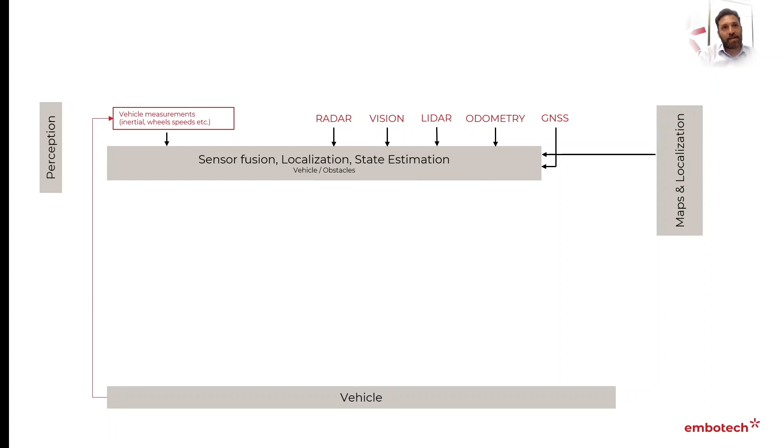This information might be augmented by other information like maps, whether HD maps or any sort of preloaded offline information, and all of this is what is normally called the perception layer of the autonomous vehicle software stack. So this is the perception. Now, once we have the perception information ready, we can then plan some navigation. So this could be a long-term route planning. Navigation together with sensor fusion, localization, and estimation will give rise to the behavioral planning of how the vehicle is going to make certain decisions.

From the sensor fusion, the perception layer, we can also do estimates on how other users are going to move in the environment. So how obstacles, whether other vehicles or pedestrians, are going to participate, and we're going to make predictions on how they're going to move in the future. And all this information together with the vehicle state estimation.

So state, remember that estimation is those things that we don't measure directly, but we estimate, we infer from other measurements, and also together with the drivable space and the high-level plan and the dynamical obstacle prediction, all fit together in what we call the motion planner. So the motion planner is the decision-making part that actually and eventually decides how the vehicle is going to move.

Again, I'm going to show a lot more details later on. And this is what we call the decision-making part. So decision-making is not just the motion planner, but it's also the prediction of the participants, the behavioral planning, and the navigation itself. The motion planning output is actually a detailed plan of how the vehicle will move. We will see later that there actually are two ways of doing the motion planner.

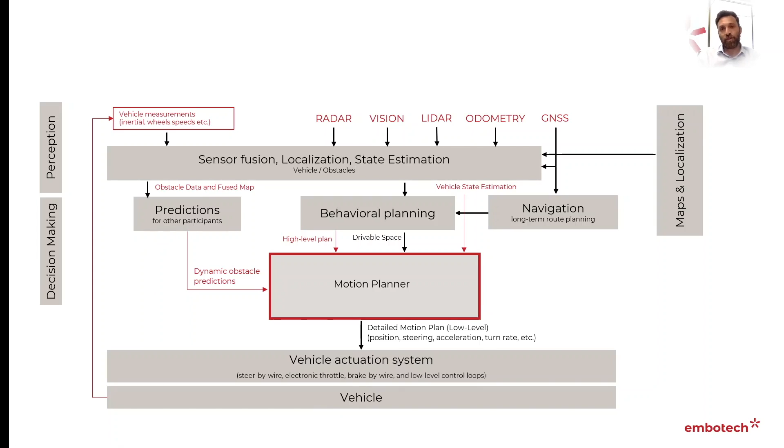Now, why is this not fed into the vehicle itself? Normally, a vehicle built by OEMs, original equipment manufacturers, already has its low-level controller. This is a very well-tuned controller that tracks certain commands. Here I give some examples, like the steer-by-wire, electronic throttle, and so on. So this information feeds the vehicle actuation system and eventually goes into the vehicle. And this is what we call the vehicle itself.

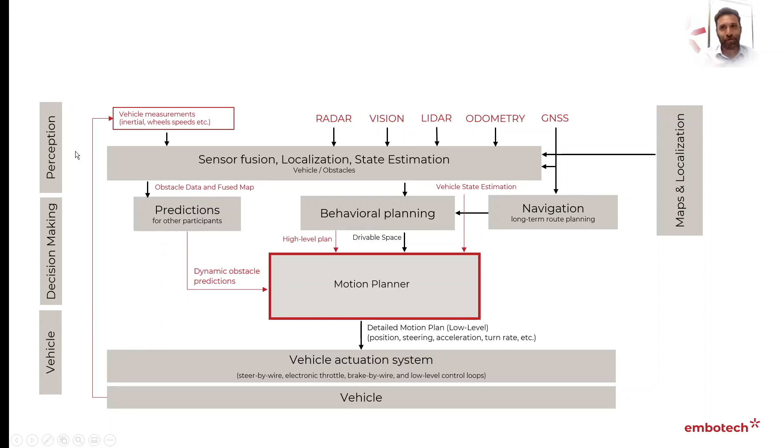So if you can see here, I've given a little bit of detail of the overall architecture of autonomous driving, but I split this architecture into three components: the vehicle, the decision making, and the perception. What's going to happen later on is I'm going to ignore the vehicle itself. This is pretty much the hardware with some low-level controllers, and I'm going to split the decision-making part and the perception into higher level blocks, and then I'm going to ignore the perception completely, not because it's not important, but because it's not the focus of this lecture, and focus on the decision-making part.

As I've already implied and actually mentioned a few times, this is not the only way of splitting the decision-making part, but it is kind of standard. I've seen it used often, and I think it's a good way of compartmentalizing the various components. Why do we tend to split the decision-making part into these 6 blocks? It is because there is a progression here on your slide from left to right on various parts.

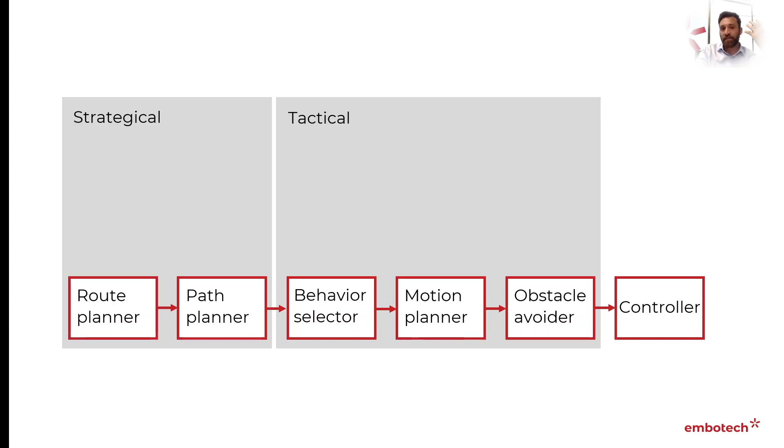And finally, there is the operational plan. Now we decided on the tactic. These are the commands that are going to be sent to the actuator to be able to follow the strategy. So this is yet another way of looking into things. I'm aware of companies that actually have internal departments split in this particular way.

Yet another way of looking at this is that what comes upstream is the motion strategy. So again, deciding how to move the vehicle. And within the motion strategy, we have what is called the scope for motion planning. So we leave the route planner outside. From the path planner to the obstacle avoider is what some people call the whole thing the motion planner. I give a slightly different definition. I call this the scope for motion planner, while the motion planner itself is one particular block within this area.

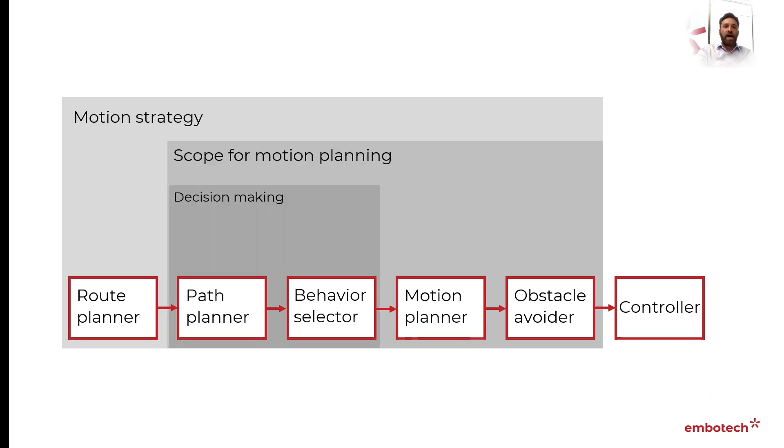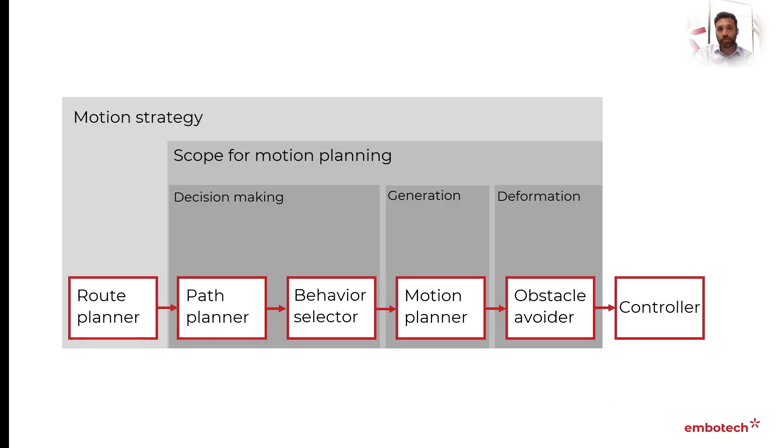And within the scope for motion planner, we have the decision-making part, which are the path planner and the behavior selector. What sometimes is called the generation, which is the motion planner. So generation in terms of generating a trajectory for the decision-making part. And then the deformation. This is called deformation because once we have a trajectory generated by the motion planner, we might want to deform or slightly modify this trajectory in order to avoid an obstacle.

Okay, so this is the end of this first lecture. What I want you to remember, if you have to forget about everything else, is that the decision-making part of motion planner is pretty much a cascaded approach. And there is a reason why it's cascaded, because upstream we have decisions that are slow to make and not very safety critical, and maybe with a very long horizon, while downstream we have very fast decisions to make with very short horizon, maybe no horizon at all, which are also very safety critical.

And also I want to make a point that it is still very unclear where some of these boundaries are. This is a good general framework, but there are no standards yet, and various companies or various research groups might split the decision-making part into different blocks.

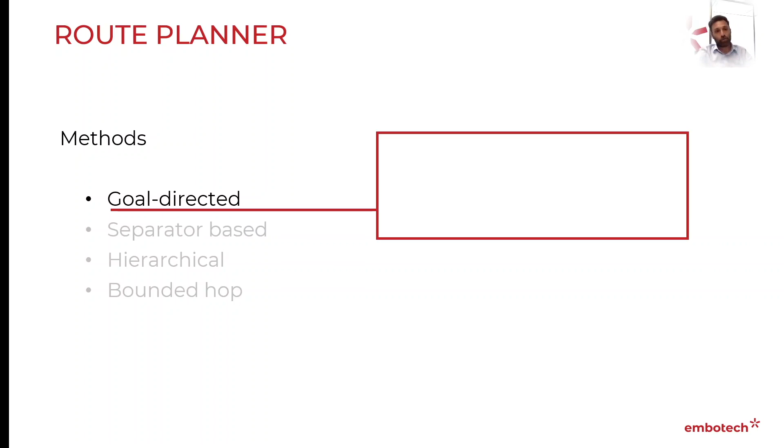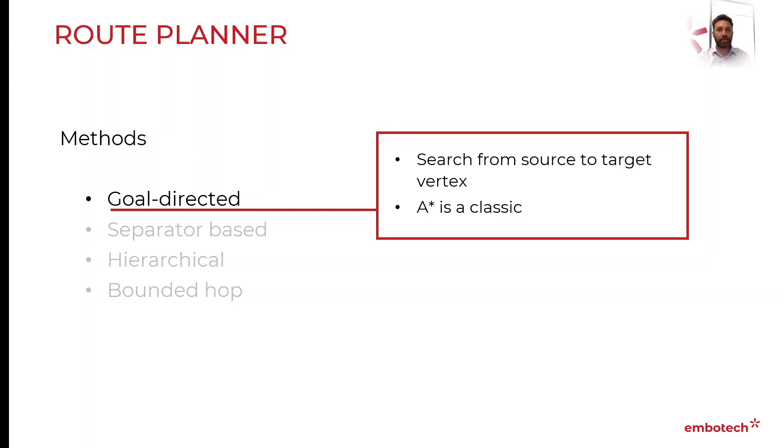Let's start from the goal-directed method. This is a search from the source to a target vertex. A-star is a classic algorithm for this. We will see the A-star algorithm appearing more than once throughout these classes.

The separator-based method is yet another way to perform route planning. In this method, we coarsify the graph by a vertex separator, superimposing another graph that is a simplified version of the underlying graph. The reason for that is to reduce computational complexity.

So a vertex separator is a small subset of vertices, a smaller graph. This creates an overlay graph which is much smaller, and therefore faster for a search algorithm to find a route from a beginning to an end.

Another method is the hierarchical method. This exploits the hierarchy of road networks. To give an example, to go from A to B there might be a lot of countryside lanes, but also a motorway. With this method, we will start from the motorway, if the motorway is an allowed path.

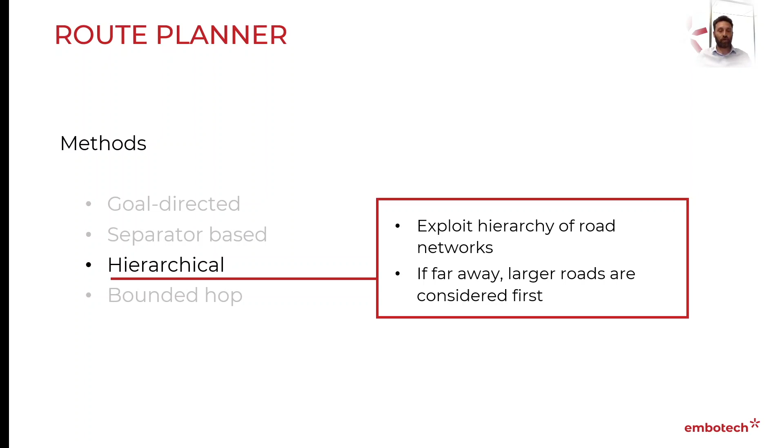That, of course, will simplify the graph, but we simplify it starting from some knowledge about the different vertices and edges that make up this graph, because we're talking about a roadway network. This method is particularly useful if you're trying to connect two very far away points - it makes sense to consider large roads first, and then go into smaller roads.

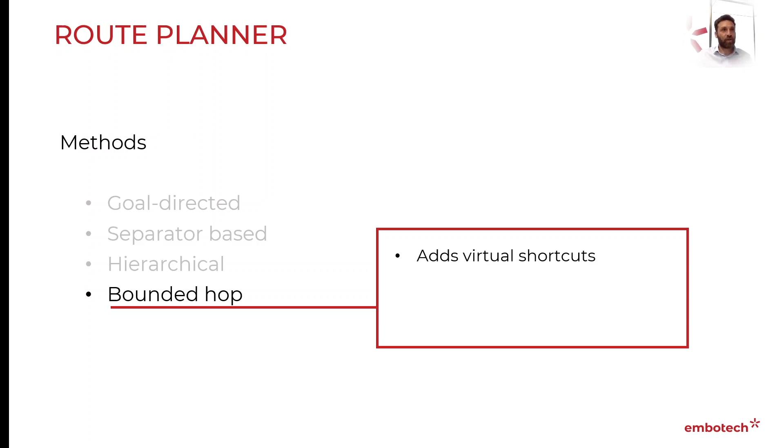Finally, there's this other method called the bounded hop method. Here we add virtual shortcuts - we make up a connection between two vertices that doesn't exist, but this connection possibly represents the shortest distance, and we pre-compute the distances between these vertices.

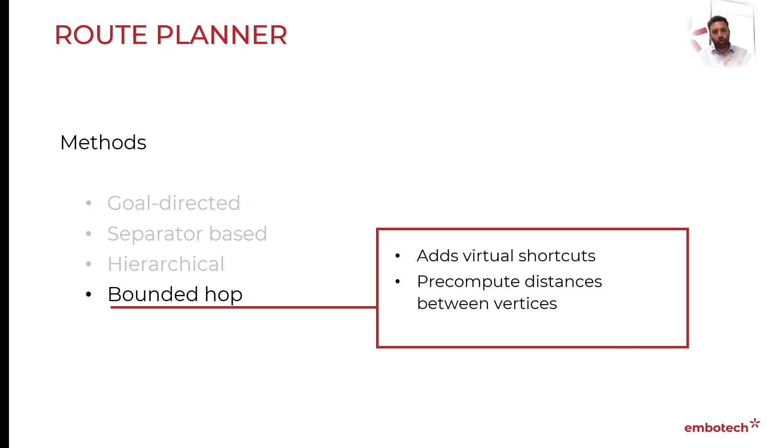Sorry for skipping to the next one. With this method, we make yet another approximation, based on the fact that we know pretty much what the shortest direction is, and then we try to fit a path to go there that is constrained by the actual route. So this is enough for the route planner.

The output of the route planner, which is a sequence of waypoints, will be fed into the path planner. The path planner computes a path for a given route. A path is a sequence of poses, and a pose is an x and y position plus an orientation.

This is an important point to make, that a pose is not just the x-y position of a vehicle, we're also interested in the orientation. This is possibly because vehicles are so-called non-holonomic systems. I'm not going to say much about non-holonomicity, but this is to do with the fact that there are non-integrable constraints.

But in any case, a path planner refines the path given by the route planner, trying to find a more realistic way of moving from point A to point B. These are the two most common methods used: the graph search method, trying to find the best path between current state and goal state.

It's also a search space discretized method, so the search space is discretized somehow, and then a graph is imposed on top of the search space on an occupancy grid map.

Dijkstra or D-star algorithm are also common methods for graph search. It's super important for path planning. A-star builds on top of Dijkstra. Dijkstra you can see as a search method which is like a wave, trying to figure out all the possible ways to get from A to B, and then calculate the shortest possible path. A-star uses some heuristics to find the shortest path, so it's quicker, it's more prone to mistake, but in practice it works much better. Curve interpolation is another widely used method for path planners.

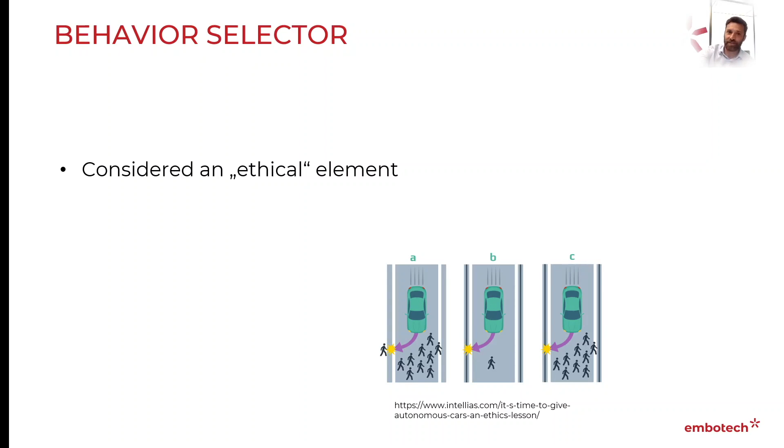But the behavior selector is indeed considered the ethical element in autonomous driving. This block usually uses a combination of heuristics and finite state machines to select the right behavior. Methods are indeed finite state machines, discrete rules based on traffic, and it's often difficult to model because of uncertainty in very complex scenarios. So finite states work very well in simple scenarios, imagine like motorway driving, where possibly the only choice you have is either keeping the lane or changing lane. But imagine a very complex urban intersection, and you can see how the finite state machine becomes very complex very quickly.

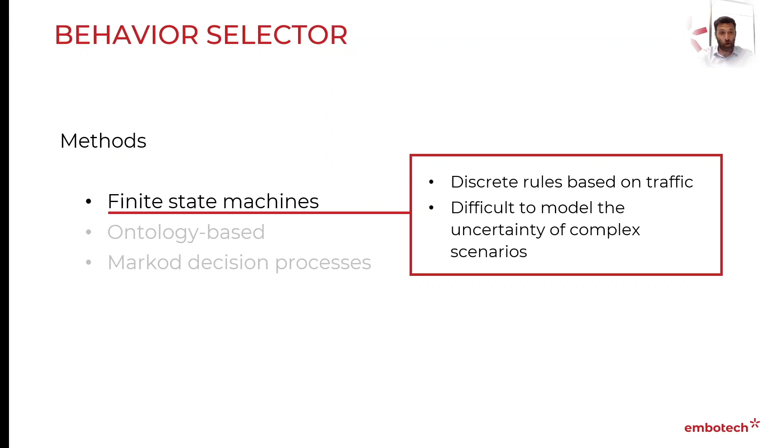Then there is this other set of methods called ontology-based. Ontology is sort of a knowledge-based method, a framework for knowledge representation. It considers rules of the road and makes decisions such as I'm going to stop, I'm going to go right, left, and so on. It builds a complex model at each location, and this complex model actually needs to be built manually. So this method also tends to become quite cumbersome in a complex scenario.

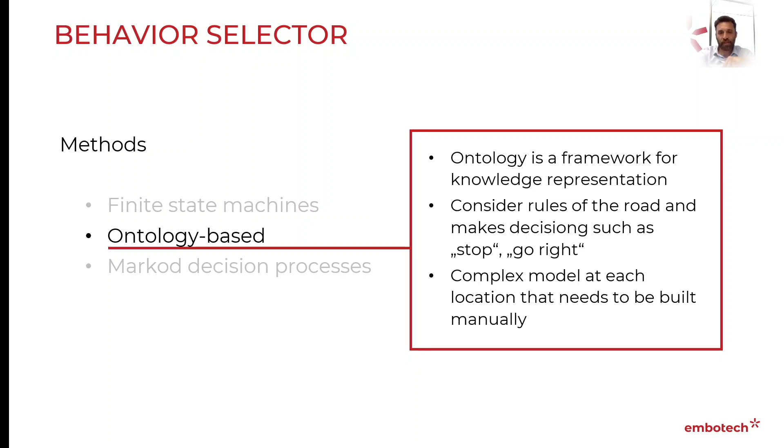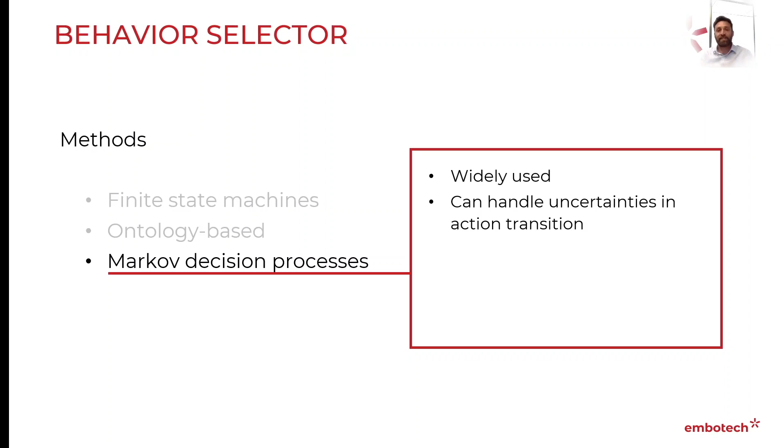And finally, there is a large class of methods broadly summarized as Markov decision processes. These are actually widely used. They can handle uncertainty in action transition. If you know what a Markov decision process is, you will see that's quite the case. So you define two particular scenarios, and in between is some sort of probabilistic distribution of cases.

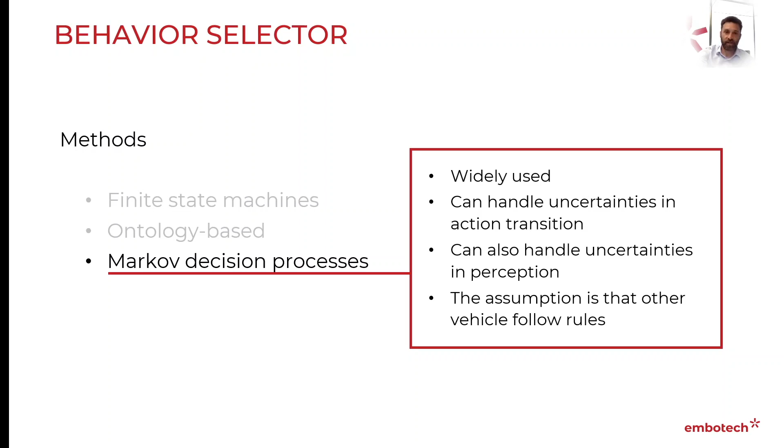Can also handle uncertainty in perception. That's an interesting thing, because although we're discussing decision making, you still have to deal with uncertainty in perception, and this method normally can be robust against error coming from the perception layer. The assumption is that other vehicles will also follow the rules, or follow this probabilistic transition in the Markovian decision matrix.

So the information from the behavior selector is finally fed to what people normally call the motion planner. The motion planner computes a trajectory from the current state to the current goal. And by the way, a goal is not necessarily an XY coordinate. A goal could be, for example, making progress along a road.

The trajectory follows the path selected by the behavior selector. So in a way, you could see the motion planner as an algorithm that makes a smooth trajectory based on the trajectory output of the behavior selector, and hopefully this trajectory is a physical trajectory that takes into account the physical constraints of the vehicle. So the trajectory needs to satisfy kinematic and dynamics constraints, for example tire limits or acceleration constraints of a vehicle.

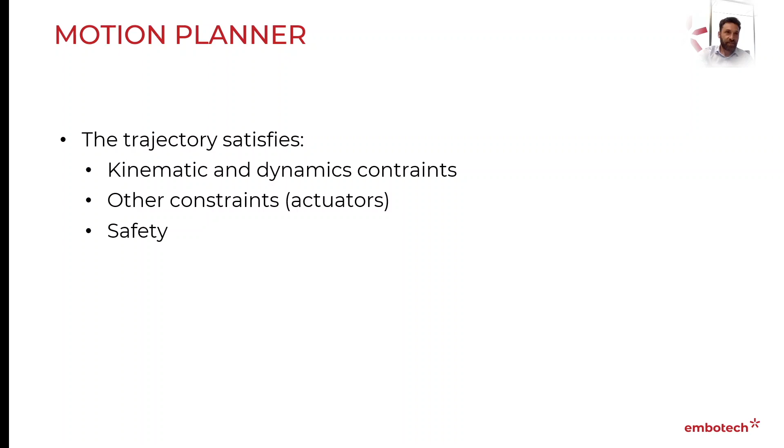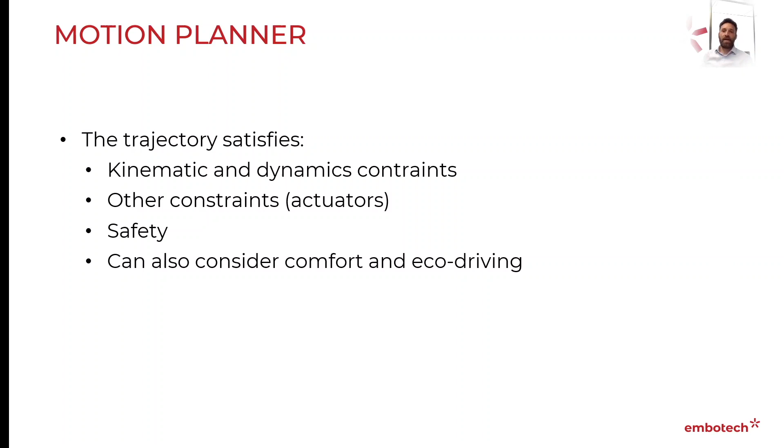It might satisfy other constraints, for example the maximum rate of turn - it's unrealistic to calculate a trajectory with a rate of turn that is beyond what the physical actuator can provide. The motion planner should take into account these physical constraints. It also takes into account safety, for example keeping stability of the vehicle. It can also consider higher level requirements, for example comfort, minimizing acceleration that can make passengers feel uncomfortable, or eco-driving, which means driving in a way that minimizes energy consumed.

So, by the way, a trajectory can be defined in two ways: as a sequence of actuator commands - literally turn the wheel by so many degrees, or accelerate by so much, or apply a braking force of so much. This command can be sent directly into your actuators if the update rate is high enough. Or the motion planner can simply output a sequence of states, in which case you will definitely need a low-level controller that maps these states into actuator commands.

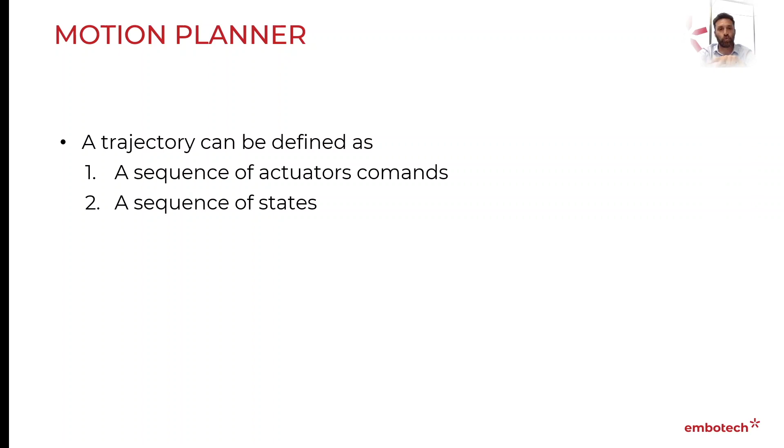It's important to distinguish between two types of driving here: structured space driving, for example road with lanes, versus unstructured space driving, for example driving in an open area like a car park. The distinction is important because in structured space you can make some assumptions, for example that you're driving along a lane and your objective is to make progress along the path. In unstructured space, the problem is slightly different - now you want to drive the vehicle from pose A to pose B, because the orientation of the vehicle also matters.

Here the type of algorithm we use is slightly different, and it's a slightly different problem to solve anyway. So the methods used for motion planning are again graph search - this is an extension of techniques used for behavior planning. The same graph search methods described earlier can be used here, but more refined, including more states. Commonly used methods are the state lattice method, elastic band, and A-star again.

I will say more on the next lecture regarding these methods. The sampling-based method is another one - here we randomly sample the state space, and then try to look at trajectories along this random sample. The commonly used method is the so-called rapidly exploring random tree. It seems counterintuitive that using random points is a good idea, but in practice these random methods, for example the RRT method, provide very quick solutions that can then be verified later on to make sure the solution is feasible and applicable.

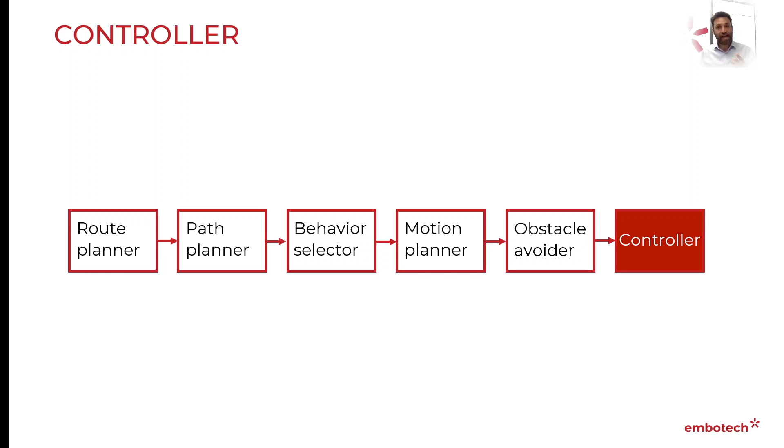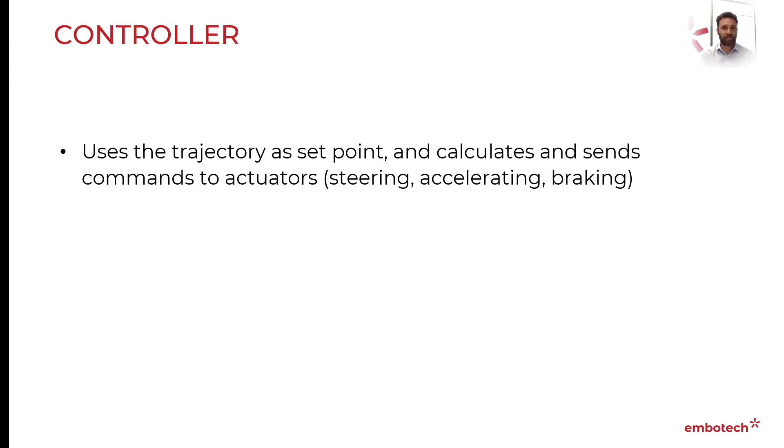This, of course, is a safety critical component, as you might have gathered. So normally the obstacle avoider is as simple as possible—the simpler the better. Finally, the trajectory, possibly tweaked by the obstacle avoider, is fed into a controller, sometimes called the low-level controller or the tracker. The controller uses the trajectory as a set point and calculates and sends commands to the actuator—steering, accelerating, and braking in a standard vehicle.

A controller can simply be a PID loop. You might remember from your control classes that PID stands for proportional integral derivative. This is a very simple reactive controller that tracks a particular set point, but nonlinear model predictive control could also be used.

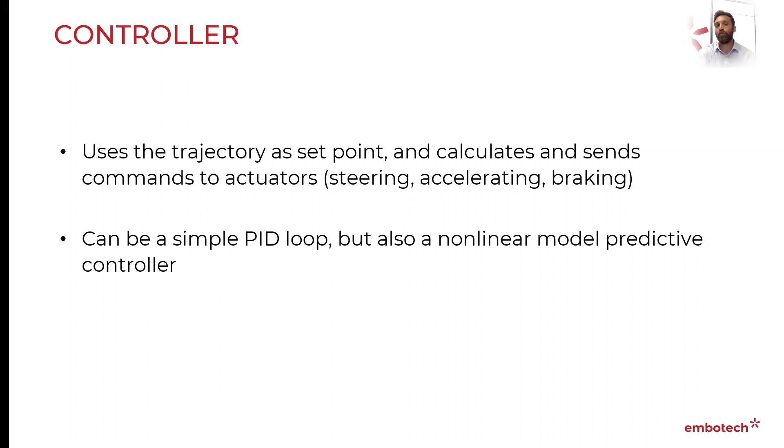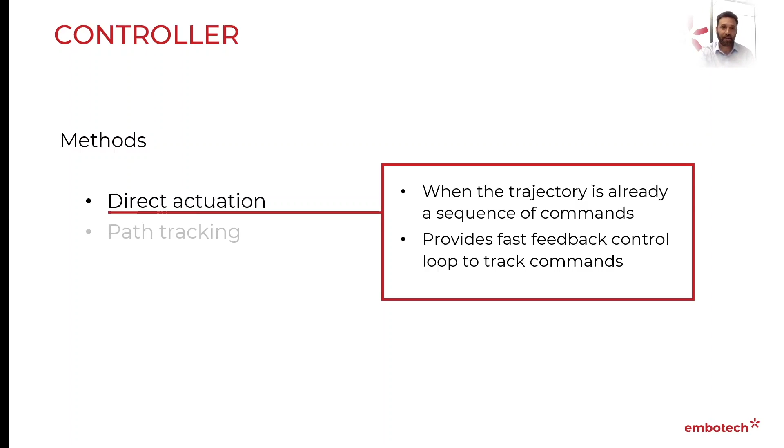We can distinguish the method into two types. One, direct actuation: if we assume the trajectory is already a sequence of commands, we can send it right down to the actuator, or provide another fast control loop to track the command. If the trajectory instead is a sequence of states, another set of methods called path tracking will transform the state into actuator commands, providing a fast feedback control loop to track states.

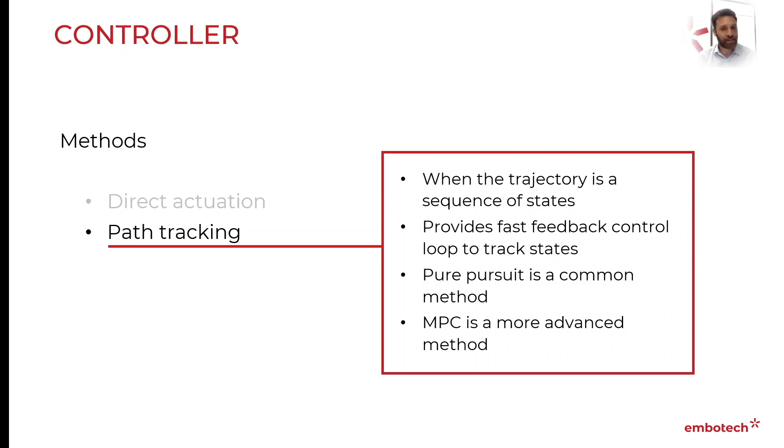The pure pursuit algorithm is a common and simple method. If you've never heard of pure pursuit, I recommend having a quick look, because it's such a classic that anyone taking a course in motion planning should know. But MPC is a much more performing method, and as I implied earlier, these days there are very fast solvers for this type of problem, so real-timeness is not so much of an issue.

Okay, so this is all I want to say about the second lecture. Takeaway points for this short video: decision making in autonomous driving is indeed a cascade of functions. I've described 6 functions here, but it could be less or more depending on how you architect your system. Boundaries between each function are quite arbitrary—later on you'll see another example where boundaries are defined differently. The algorithm choice is a compromise between computational speed, reacting to disturbances and new situations as quickly as possible, and generating an accurate plan for your vehicle.

And of course, the choice is highly dependent on the safety level required. You can have a very simple implementation that is not very safe. On the other hand, what we hope to achieve is a very safe implementation, which requires careful choice of algorithms to be safe, accurate, and computationally fast enough.

Okay, in the next lecture I'm going to leave out the route planner, not because it's not important, but because it's a big topic on its own. I'm also going to leave out the controller, again not because it's unimportant, but it's another big topic on its own, and I'm going to focus on those 4 blocks that define what people often call the scope for motion planning.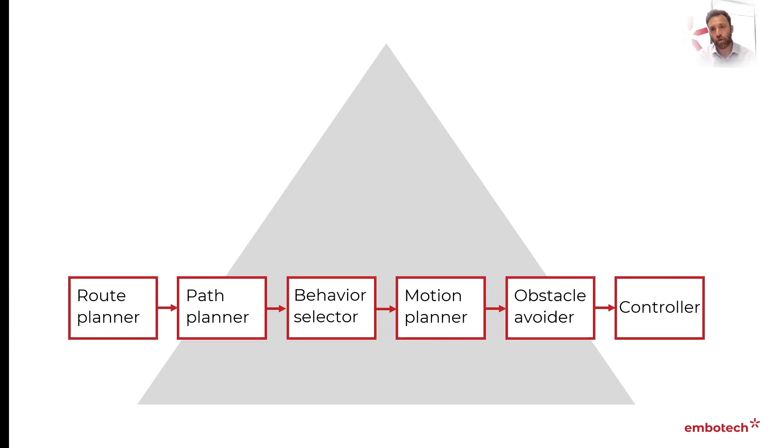And there are a lot of important points here to consider. First of all, what 'decides' means, what 'most convenient' means, and what the 'chosen criteria' are. These are actually very fundamental problems in motion planning. But let me tell you the way I see these, what these chosen criteria are and what 'most convenient' means. We can define some sort of a hierarchy of criteria. We need to drive a vehicle from A to B, or we need to have this vehicle follow a particular trajectory or make progress within a road. What are the things that we need to consider?

So first of all, I'm going to put point number 0 as the law of physics. And it sounds very obvious, but a lot of badly designed motion planners kind of ignore the law of physics, send a trajectory, a motion planning command to the actuators, and then they hope that the low-level controllers or whatever you have there can take into account the law of physics. So this is not something, the law of physics, you can escape—it's out there, but the more you take this into account at your planning stage, the less you leave it to chance in the real world. So that has to be put as number 0.

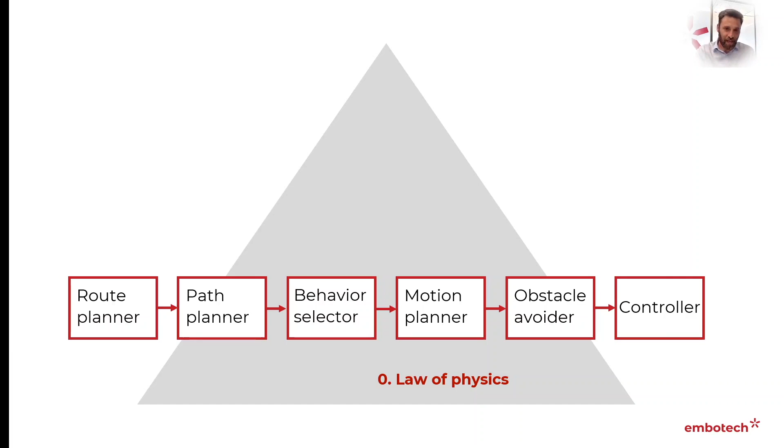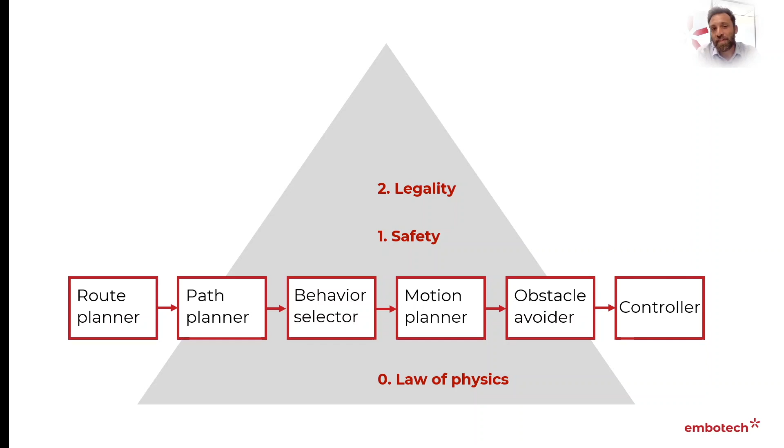Then number 1 in terms of consideration is, of course, safety. I don't think anyone has in mind to design a motion planner that doesn't consider safety at the very bottom level of decision making. And of course, by safety here, I'm thinking about not hitting any obstacles or not hurting anyone. Above safety, I would say there is legality. Once your motion planner can satisfy the safety requirement, the second thing you should care about is that you're respecting the rules of the road.

On top of legality, I like to think that the next constraint or requirement is physical and mental comfort. And what I mean by that is physical comfort in things like motion sickness, or actually feeling comfortable within a vehicle being driven by a robot. And what I mean by mental comfort is what some people also call perceived safety. And remember that an autonomously driven vehicle could be perfectly safe, but if it doesn't feel safe, that could give you some mental discomfort.

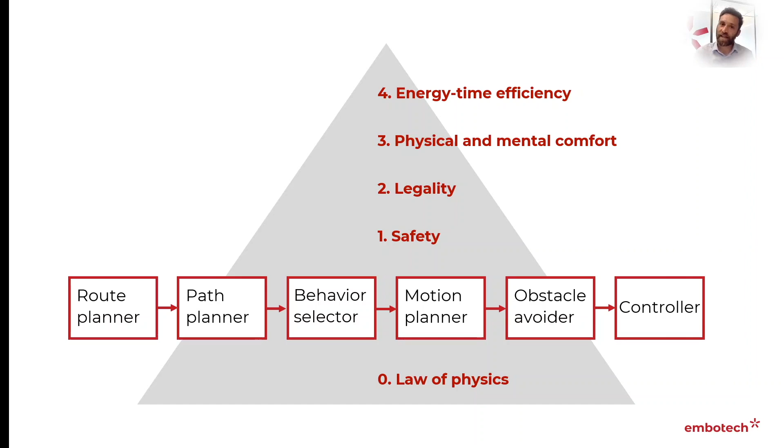And at the top of this pyramid, I will put other considerations such as energy and time efficiency. So once safety, legality, and comfort are accounted for, the motion planner could do things such as optimizing journey times or minimizing energy consumption.

For example, is the output a space? Is it a path? Is it a particular trajectory, a trajectory of waypoints or a trajectory of states? Is it a maneuver, so some sort of high-level information such as overtake or keep the lane, or is it even a symbolic representation? So this is one classification that can be made based on their type of output.

Another classification that can be made is based on the space-time property of the algorithms. This is basically to say, is the algorithm of some sort of predictive or reactive nature. So if you're familiar, for example, with dynamic programming or model predictive control, you already know that these are predictive types of algorithms, while reactive algorithms could be very simple control loops like a PID controller.

And finally, the third classification is to do with the mathematical domain the algorithms belong to. So this is the philosophy of the approach and the framework of the solver of what the algorithm is trying to figure out. So let's have a look now at a sub-classification of the algorithms.

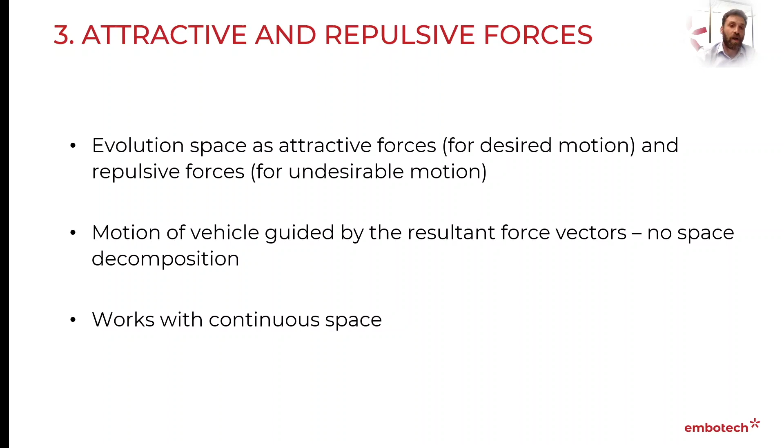So I'm going to show two of these algorithms. One is the so-called artificial potential field. Here in this method, we assume that the vehicle moves in an abstract artificial force field. As you can see here, there is an attraction force and repulsive forces given by obstacles.

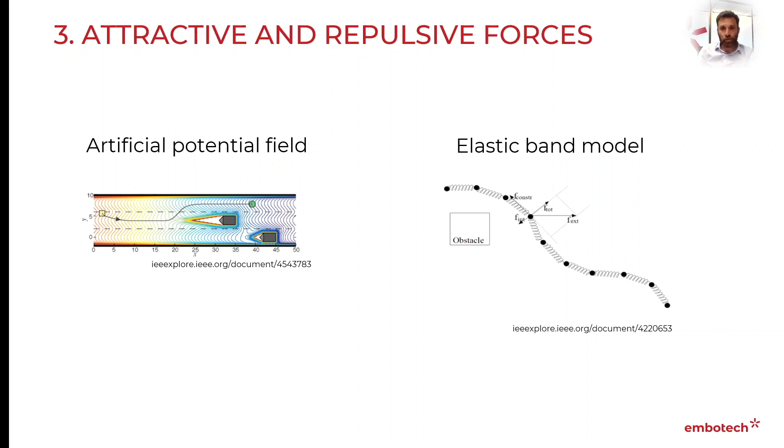Another type of algorithm is the so-called elastic band models. These are mainly used for lateral control and for obstacle avoidance. So the environment is modeled as a spring mass system. So if you think of a car moving through a field with obstacles and trying to maximize the distance between these obstacles, maybe a distance also proportional to the relative speed between obstacles, then having stiffness in springs that somehow reflects how far you want to be from these obstacles will give you a solution that goes through the obstacles.

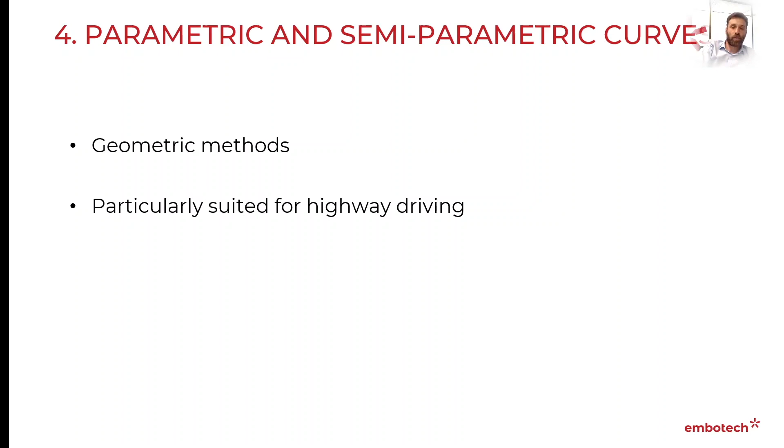The fourth class of algorithm is the parametric and semi-parametric curves. These are geometric methods. They are particularly suitable for highway driving, so for a structured space where we have lanes. These are curve-based algorithms that can implicitly take into account the kinematic constraints of the vehicle. I'm going to describe two here.

One is the point-free algorithm, for example, tentacle schemes. The point-free method builds kinematically feasible trajectories as a set of candidate solutions, which are basically maneuvers. As you build up these maneuvers, you need another algorithm, another decision maker, to choose the most convenient among these maneuvers.

The other set of methods are called point-based methods, and these are methods that use curves to fit waypoints, which could be sampling points or cells. So the output is a path or a trajectory. The curves can be used to have properties such as minimum length or minimum curvature, so they can include curvature constraints.

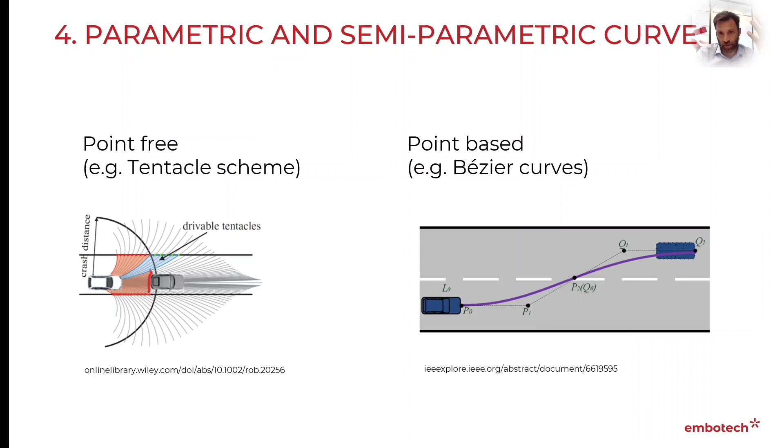Spline curves have good properties, and Bezier curves, like the curve shown here, are effectively an important class of spline. The important thing to remember with Bezier curves is that you don't necessarily go through waypoints, so you can cut through some corners. So these algorithms have to be used with care.

Now, the fifth class of motion planning algorithm can be grouped under the umbrella of artificial intelligence. There is so much there that I'm not going to even try to explain and classify everything, but just give some general guidelines. What artificial intelligence algorithms effectively do is try to simulate human reasoning and learning.

They are generic and flexible, which is both an advantage and a disadvantage. An advantage because they can learn, so automatically they can end up doing the right thing. The disadvantage is that you lose determinism. You don't know exactly what they learned and how they learned, which could be disastrous in motion planning. So they're mostly used for predictive planning, which is less safety critical; remember, predictive planning comes more upstream, more on the left of the sequence of block diagrams that we saw earlier.

We can classify artificial intelligence algorithms as human-like algorithms: risk estimators, taxonomy models, or game theoretical models. Then we have heuristic algorithms: support vector machines and evolutionary methods. Then the so-called approximate reasoning algorithms like fuzzy logic, artificial neural networks, and reinforcement learning. And finally, logic-based algorithms, which are more rigid and difficult to implement when the logic becomes difficult. These are rule-based algorithms, decision trees, and finite state machines.

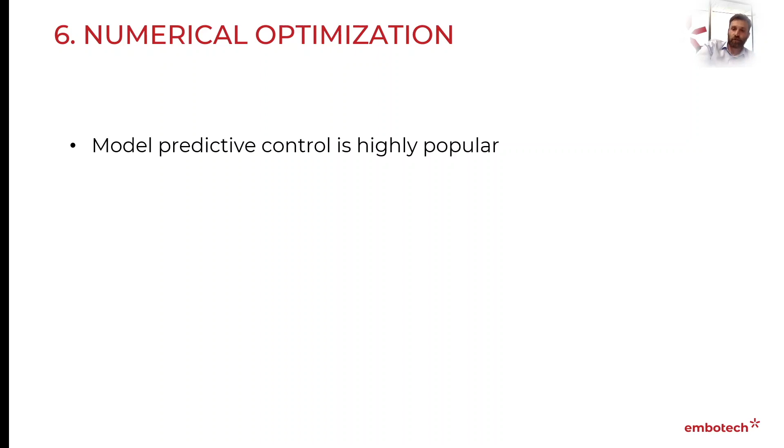Model predictive control is a highly popular method. Model predictive control uses numerical optimization to find a solution to the motion planning control problem. The solution often requires solving a nonlinear programming problem. Such problems, if not set up correctly, can be difficult to solve, but these days there are good solvers for finding effective solutions in real time. The problem is nonlinear because vehicle dynamics are inherently nonlinear.

Some approximations have been proposed where you first linearize the nonlinear model of the vehicle around some operating point, so you can solve a linear or quadratic problem effectively at each linearization point. But this is a trade-off to see whether the approximation is suitable. In general, if you're controlling a vehicle, the vehicle is a nonlinear system, and therefore a nonlinear programming problem will have to be solved.

Dynamic programming is another method widely used, especially for finding global solutions. There is the curse of dimensionality with dynamic programming, but on the other hand, you can easily deal with nonlinearities.

Let's have a look at what an optimization problem looks like. This is a generic form. If you've never seen things like this before, don't get scared by the notation. We'll try to explain what the things mean.

At the beginning, most of all, we need to have an objective function. The objective function is effectively a mathematical description of the goal you're trying to achieve. The goal could be hitting a goal state, or it could be, for example, making progress along a path.

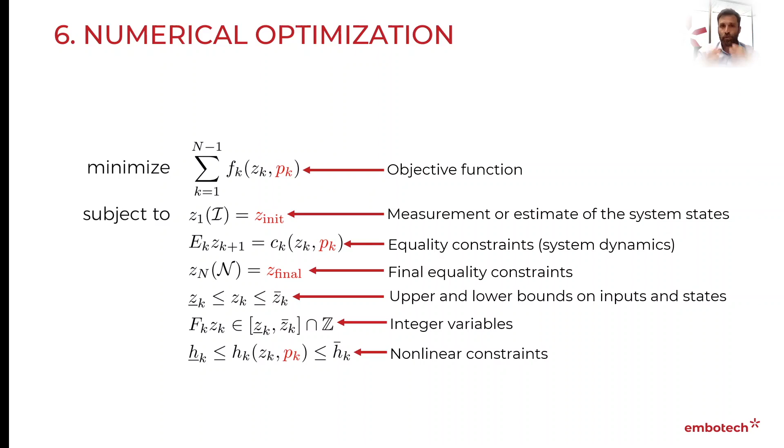There are upper and lower bounds. These are inequality constraints, for example, actuator limits or space limits. You can also include integer variables to make the problem more complex, and nonlinear constraints. This is pretty much the form of a numerical optimization problem. If you can describe your motion planning problem in this form, there are ready-made solvers for finding a solution.

The takeaway point of this lecture is that I presented a classification of algorithms for motion planning. The focus here was more on structured environments. These algorithms are particularly suitable for highway driving. In unstructured space, things can be a bit more complicated. I hope this lecture helped you make sense of the huge literature in this area.

In the paper I'm referring to, they have interesting spider maps where you can see how the algorithms map to the taxonomy we discussed in the previous lecture. For example, for space configuration algorithms, these are geometric methods and set algorithms in particular. For optimization algorithms, the last one I've described, these are solver algorithms and predictive horizon algorithms, but also make heavy use of logic and heuristics. Again, if you refer to the paper, you can see the mapping between algorithm type and taxonomy for all the other algorithms we discussed.

This concludes lecture 4, and it also concludes the architecture I presented. We started, if you remember, in lecture 1, looking at the full architecture of autonomous driving. Then we focused on the decision-making part, then went down to another layer of motion planning, and that's where we stopped. What's going to happen next? I'm going to deliver two more lectures: one on a particular control technique called model predictive control, and another on a more advanced method for motion planning.

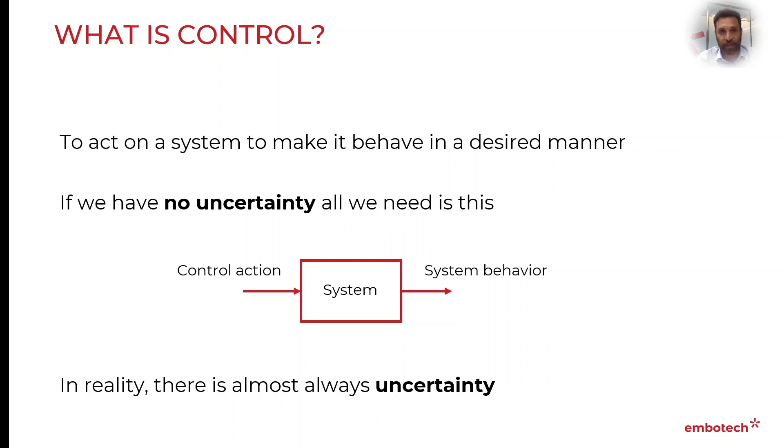So what is feedback control? It's the only way to deal with uncertainty. And this sounds obvious, but I think it's something people often miss. If there is no uncertainty, there is no need for feedback control. If there is uncertainty, the only way to deal with it is by feedback.

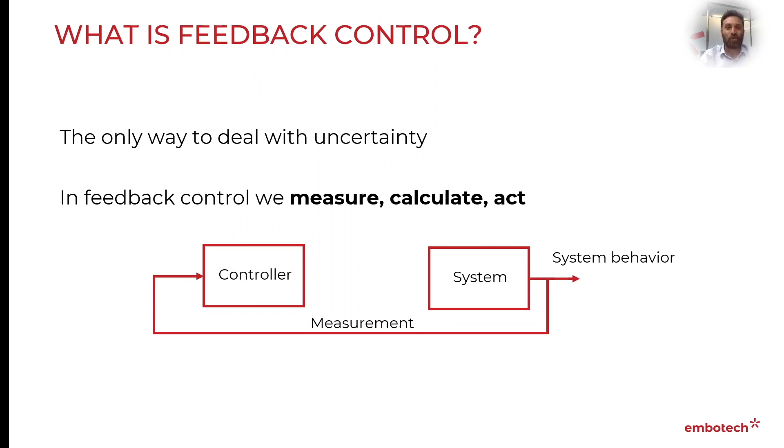So in feedback, what we do is measure, calculate, and act. So again, starting from our system, there is a system behavior we're trying to achieve. We take some measurement, put this measurement into a controller, the algorithm, and we calculate the control action. So the controller is actually where we execute our control algorithms.

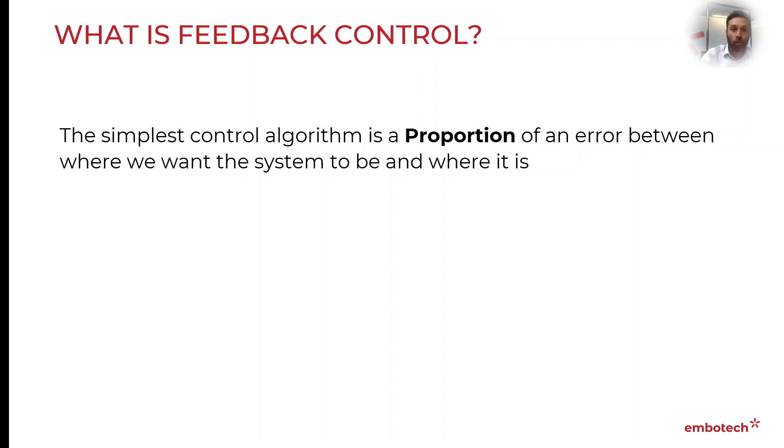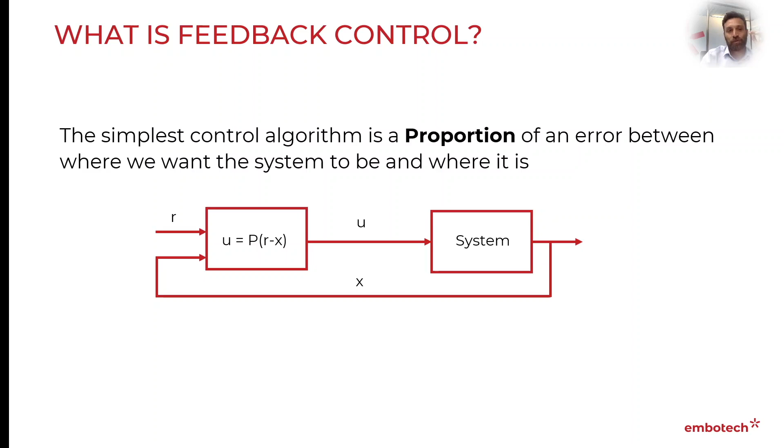So the simplest control algorithm is a proportion of an error between where we want the system to be and where it actually is. So for this very simple example, a simple control U is the proportion of a difference between the input R and our measurement X.

The control algorithm that computes the sum of the proportion, the integral, and the derivative of the error—guess what it is? That's the PID controller, very famous. If you never heard of the PID controller, have a look at that. Still widely used, PID controllers are super simple to implement.

They look at the present, the past, and the future. Sometimes in feedback control, it's more important to have a fast loop than a precise loop. That's where PID controllers still have their place, despite their simplicity.

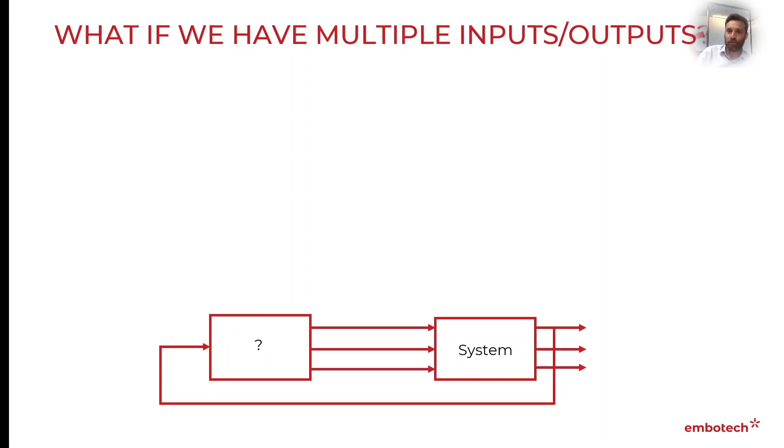But what if we have more than one input and more than one output? What if the system diagram looks a little bit more like this? With a PID controller, things become a little bit more complicated. For example, in this case, we have 3 inputs and 3 outputs. You effectively need 9 PID controllers to control every possible combination of input and output—9 times 3, which is the number of parameters you have to tune. The number of parameters becomes very large and unmanageable.

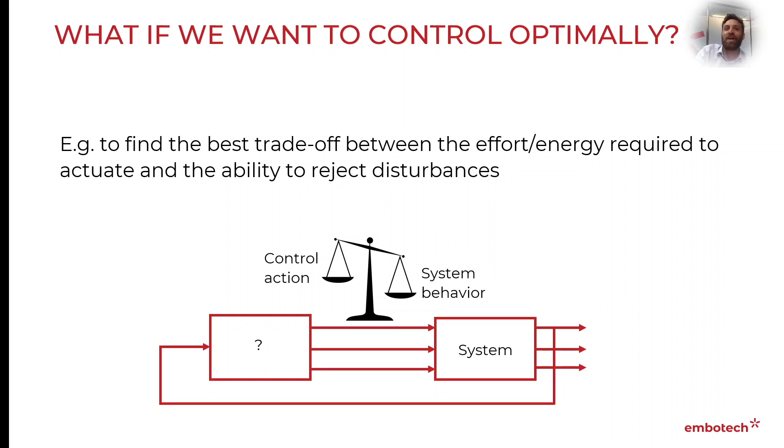And what about when we want to control the system optimally? Optimally, for example, is to find the best trade-off between the effort, the energy required to actuate on the system, and the ability to reject disturbances—the ability of achieving the desired behavior. You can't simply do that by manually tuning a PID controller, unless you do it in a sort of trial and error fashion.

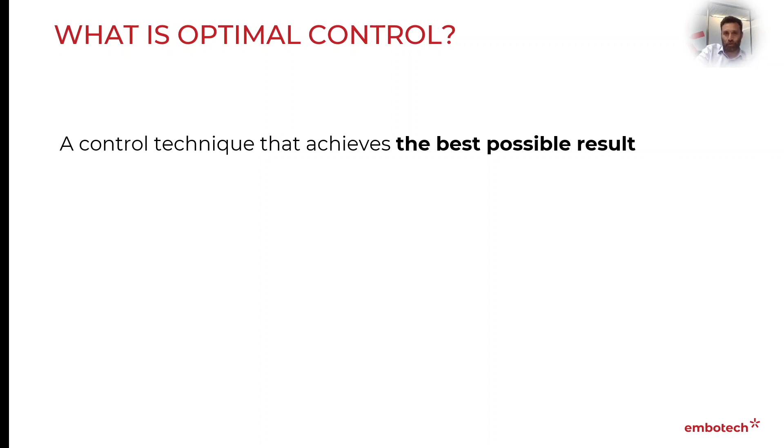So, what is optimal control? That's the next question. This is a control technique that tries to achieve the best possible result. And what is the best possible result? In mathematical optimization, the best possible result means finding the minimum of a mathematical function, often called the objective function.

For instance, something that looks like this. And again, if you've never seen this before, I'll try to explain in simpler terms what this is. This term is a measure of how much the system deviates from the desired behavior. This one is another term that says what the required effort is. And this is a summation from now until the end of time.

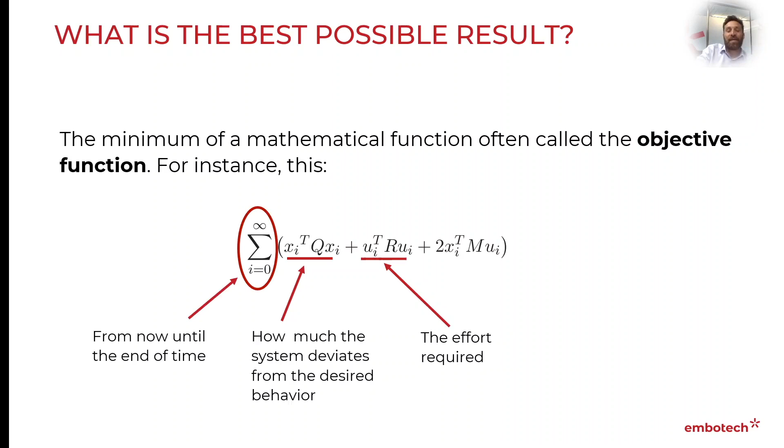So basically what we're saying here is that we measure how much we deviate from where we want to be, and how much effort is required. We're going to sum this for every possible step into infinity, and we're trying to minimize that—trying to make this value as small as possible. I've included another term here for completeness.

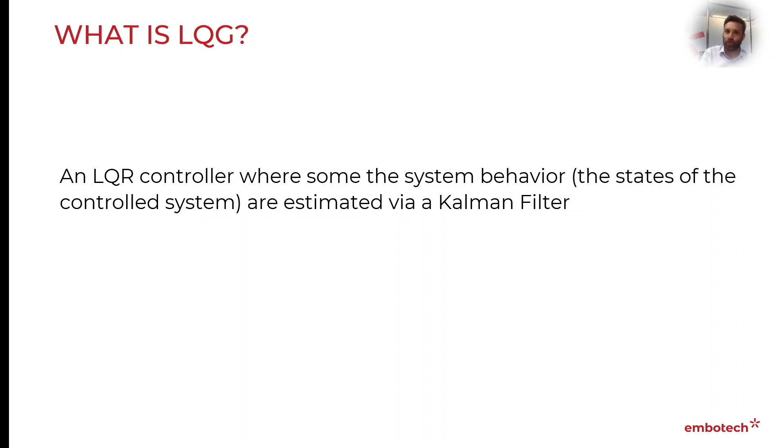What is LQG? You might have heard of LQG as well, with all the three letter acronyms we have. An LQG controller is a controller where some of the system behaviors, or some of the states of the controlled system, are estimated by a Kalman filter. You can't always assume you measure everything you need, so sometimes you need to estimate some of the state of the system by inferring from the measurements you have. If you do that using a Kalman filter, and you control your system with an LQR controller, that's an LQG controller.

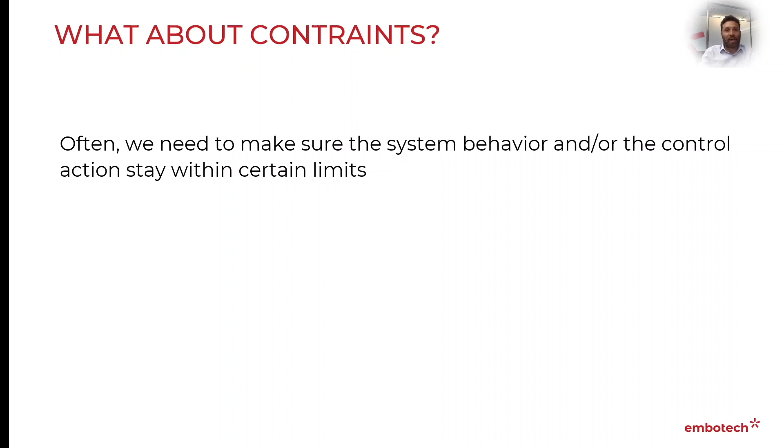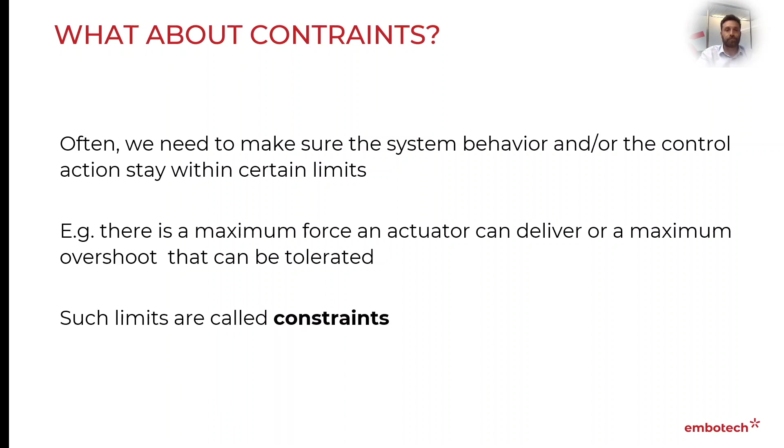So what about constraints? Often we need to make sure that the system behavior and the control actions stay within certain limits. For example, there is a maximum force an actuator can deliver, or a maximum overshoot that we can tolerate. We call such limits constraints.

Now we got all the ingredients to go back to the original question: what is MPC? In its simplest form, an MPC controller is an implementation of an LQR controller, or LQG if you need to do some estimation. So it's an LQR controller that is also able to satisfy constraints. Again, that's in its most vanilla of implementations.

This is linear MPC. In terms of constraints, linear MPC and constrained LQR are similar. I'm going to show the constrained LQR problem, and then MPC is actually the implementation of the constrained LQR problem as a feedback control loop.

Again, this cost function can be built in many different ways. Just accept for the moment, if you haven't seen this before, that this is a mathematical expression of something that we're trying to make as small as possible by selecting U appropriately.

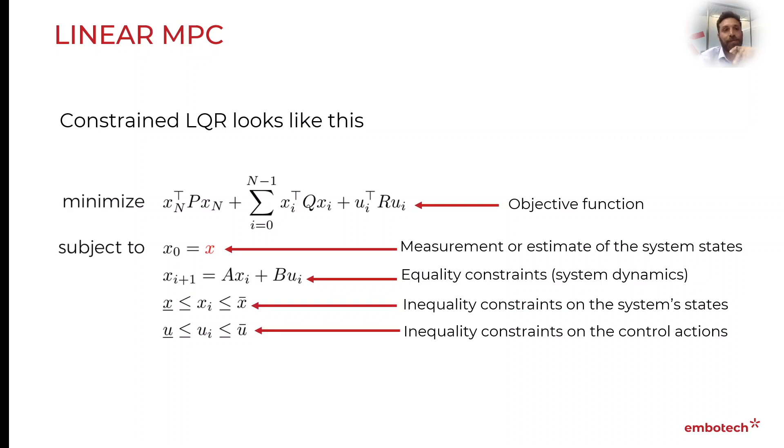So in linear MPC, in the optimization problem I showed earlier, we have all the ingredients we need to solve this problem. A and B are the system state space model matrices, which we should have. Q, R, and P are so-called weights, and these are actually tuning parameters that you can choose.

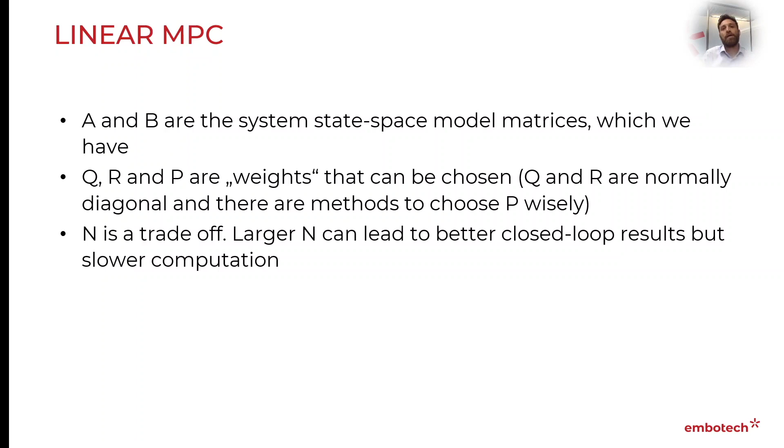These are normally diagonal matrices, and there's a very good way of choosing P wisely. N, the prediction horizon, determines how many steps we look into the future, and it's also a parameter and a trade-off. The more we look into the future, the better we can control, but the optimization problem becomes larger and might be more difficult to solve. In reality, there are very good practical methods to decide an acceptable number of steps to look into the future.

So how do we actually implement MPC? We measure or estimate the system states, which are the outputs of our system. We solve the optimization problem, putting the output of our system into the optimization problem we saw earlier, and solve it. There are very good solvers to deal with it.

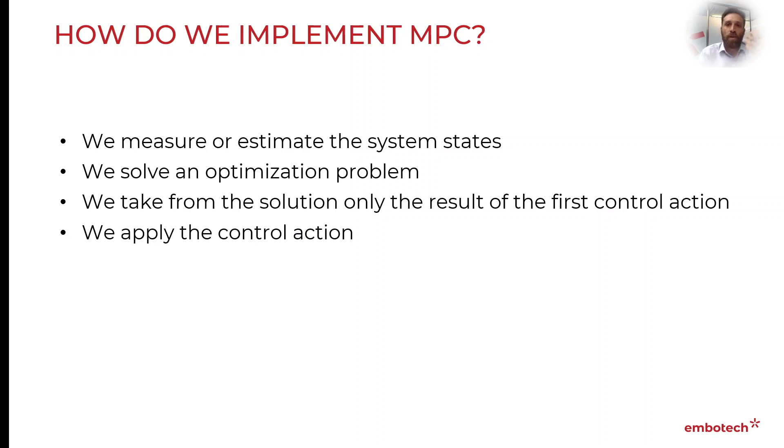We take the solution of this optimization problem, which is a trajectory into the future, and we only pick up the first control action. We apply the control action, and then we solve this problem again. Because we solve this problem again, MPC is often also referred to as receding horizon control, because we look N steps into the future and we keep receding that horizon.

When should we use MPC compared to other control techniques? I would say MPC is particular. MPC can do two things: regulate, bring a system to a particular state, or generate a trajectory. But I would say MPC is particularly suitable when you have control problems with constraints and more than one input and output. It's true you can clip input constraints—for example, if you have actuator limits, you can simply use a PID controller and saturate the control limit. But as soon as you saturate, you realize you're not behaving optimally anymore.

Can MPC run in real time? I would say that very often these days, this is the case. This is thanks to progress made in algorithm development—thanks to mathematicians finding better ways of solving the optimization problem—but also thanks to better hardware implementation. Rather than using a generic method, you can specialize more to the particular hardware and the particular structure of the problem. There is a lot being done to make MPC run in real time, so megahertz rates are not unusual, especially for the linear MPC case.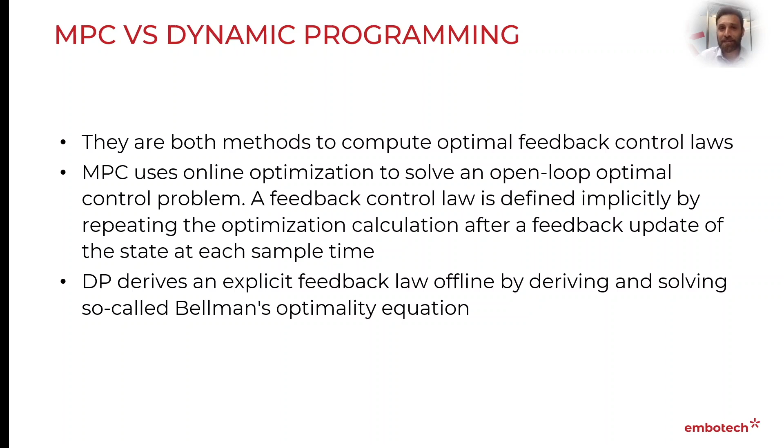What is the difference between MPC and dynamic programming? They are both methods to compute optimal feedback control laws, so in this regard they do the same thing. But here's the difference: MPC uses online optimization to solve an open loop control problem, and the feedback control law is defined implicitly by repeating the optimization calculation after a feedback update of the state at each sample time. That's how MPC works. Dynamic programming, on the other hand, derives an explicit feedback law offline by deriving and solving the so-called Bellman's optimality equation. I think this is a good definition—it's not comprehensive, so if you're interested, go find out more.

What is the difference between MPC and reinforcement learning? Reinforcement learning is a model-free and adaptive method, so the system model is kind of learned online—it's not explicitly given a priori. Reinforcement learning actually has lower online complexity than MPC, so it could be faster in certain cases. But reinforcement learning is nowhere near as mature as MPC in terms of stability guarantees, constraint handling, and general robustness of the method. The fact that you're learning the model online has some advantages, but can also make things less suitable for safety critical applications. So the lack of robustness is what makes reinforcement learning a technique that is inferior to MPC for safety critical applications.

So this is what I want to say—the takeaway point from this short talk is that you should use MPC when you have constraints and multiple inputs and outputs, and also remember that MPC can be used in two ways: either as a regulation problem or as a trajectory generation problem. MPC is actually particularly useful for trajectory generation, and in the end MPC comes down to solving an optimization problem. It takes some knowledge and understanding to transform an MPC problem into an optimization problem, and it takes a lot of effort to actually solve it, but luckily there are a lot of solutions already out there, and some of the freely available solvers are extremely powerful. So don't be afraid to use MPC. Learn how to set it up, and then go find the best solver for your particular problem.

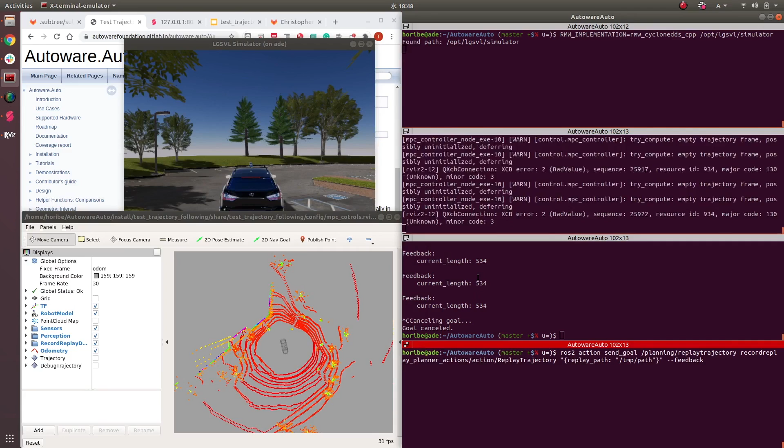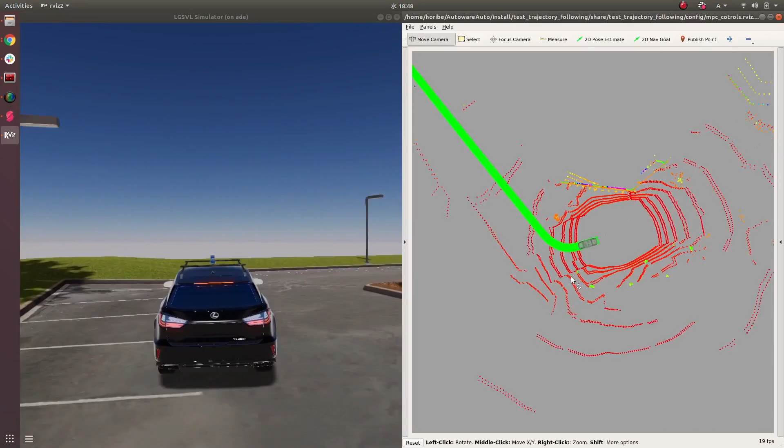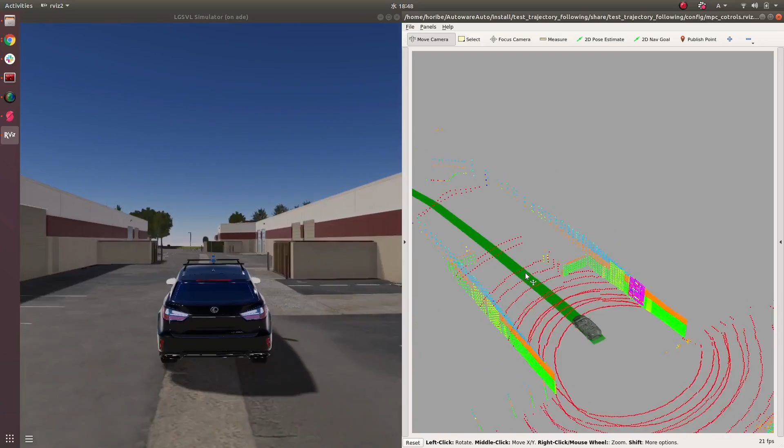Then you can see the recorded path is visualized in RViz and the vehicle is going to move. Okay, that's all. Thank you very much.

Hello again, everyone. This is the last of the series of lectures prepared and recorded for the Autoware Academy. In this last lecture, I want to show you a particular technique for solving the motion planning problem. I like this technique specifically because it merges together some of the blocks that we saw in previous talks, and it solves the problem almost in one shot. I think it's quite elegant and quite powerful, and I just want to share with you how this can be done.

Okay, so we've been seeing this block diagram multiple times now, and I've been trying to convince you that this is a good way of splitting the motion planning problem, or the decision-making problem, into sub-problems, into good, well-defined chunks. But what I'm going to show you now is an advanced technique that integrates some of these blocks and tries to solve the motion planning problem in a single shot.

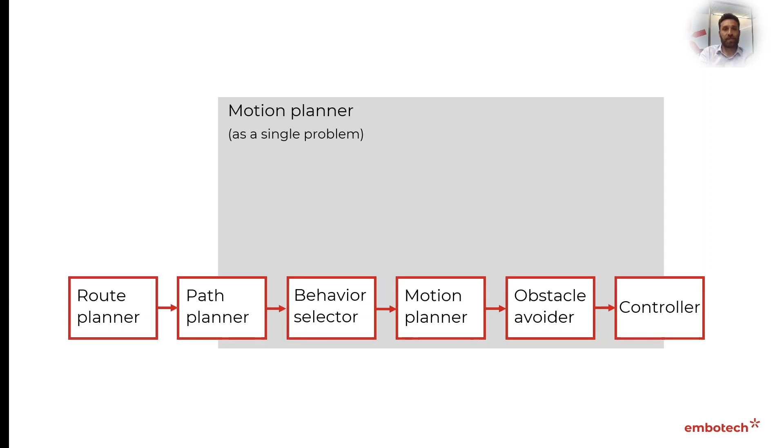But the main point here is that the motion planning problem can be solved as a single problem. The work I'm going to show you next is based on this paper. The authors show how to solve the path planning problem and path tracking problem as a single problem. Everything is framed as a nonlinear MPC formulation. We've seen a little bit what MPC is. This is a full nonlinear implementation because the vehicle model is nonlinear, and also because of the way the cost function and constraints are set up. Where obstacle avoidance is needed, some pre-processing is also needed, and I will show you why that's the case.

So let's remind ourselves why the motion planning problem is split into these sub-problems. There is a progression going from left to right, from upstream to downstream, that makes it easier, from the practical point of view, to split the problem. If you remember, upstream we tend to have slower updates; timing is less of an issue. Downstream, on the other hand, updates tend to be faster. From the prediction horizon point of view, upstream we tend to look very far into the future, for the route planner all the way to the goal state, while downstream, for the lower-level part of the motion planner, short look-ahead horizons are sufficient.

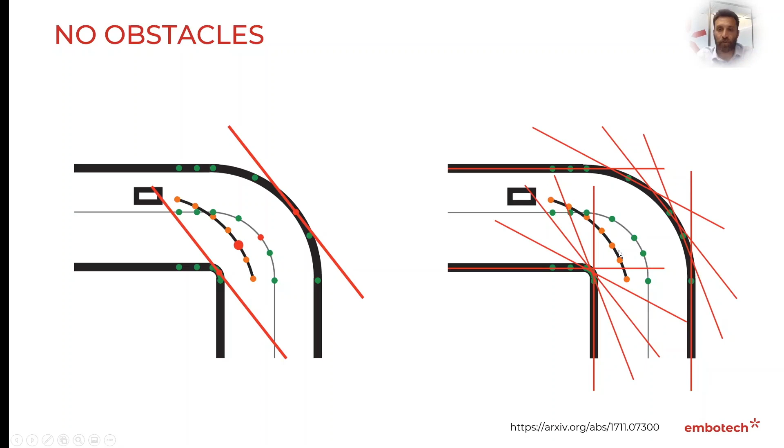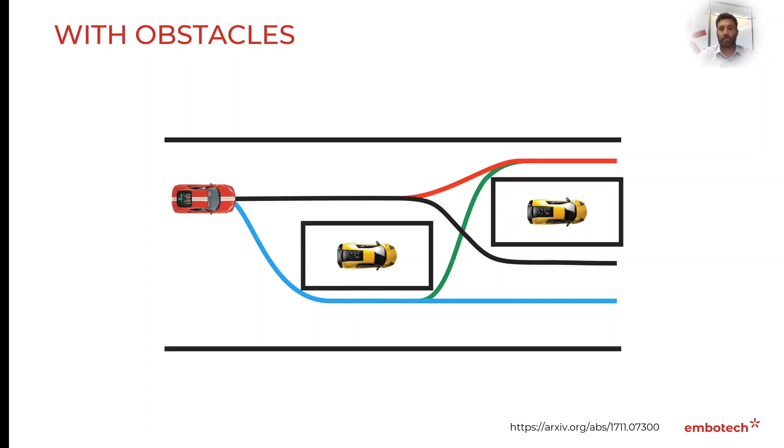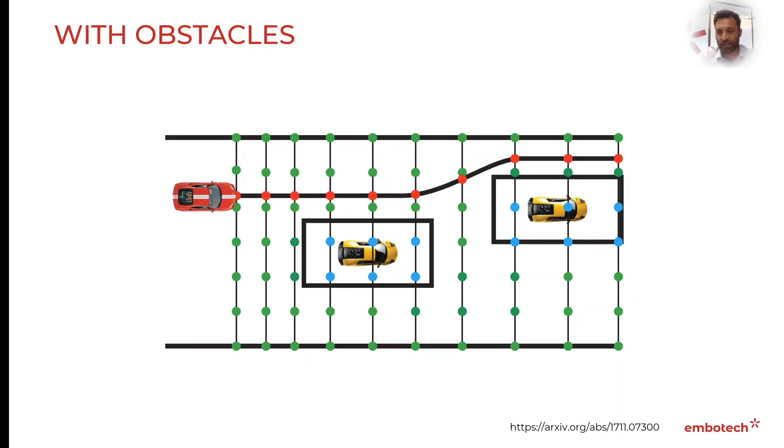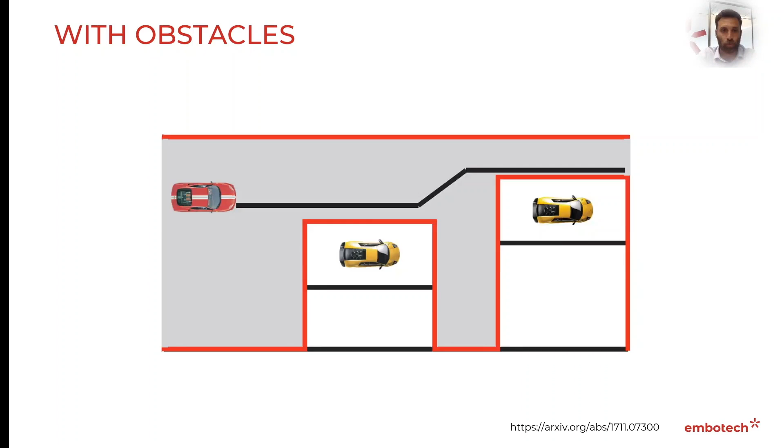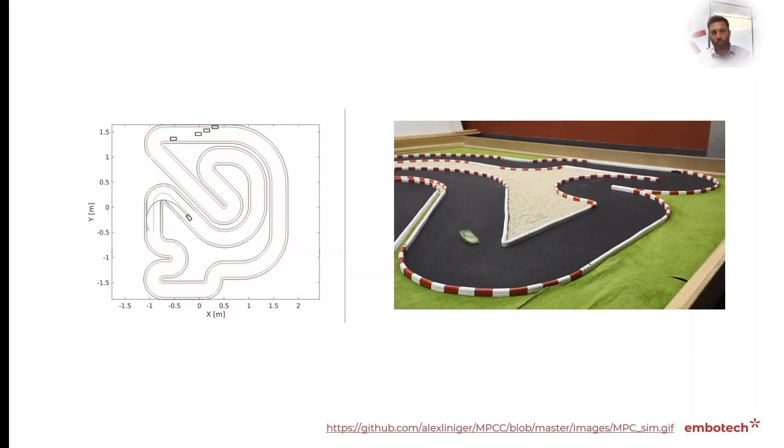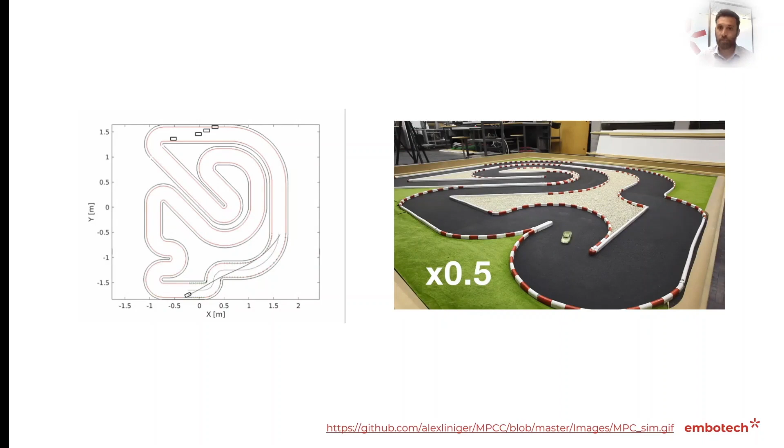I've also borrowed some videos from the authors that show on the left a simulation. So you can see actually here the vehicle running. You can see a line representing the center line, another line representing the trajectory that has been planned. So I shouldn't make a mistake here. This is not just a path, it's a trajectory, so it's a whole set of acceleration, steering, and so on. And on the right, you can see the actual implementation on small-scale cars. The paper was actually developed for autonomous racing, but the technique is perfectly applicable to lane driving.

So what are the main points to remember about this approach? Well, the motion planning problem can be solved in fewer steps. Obviously the splitting into chunks makes the problem more manageable, but there are clever ways of reducing these steps and solving more of the motion planning problem in a single step. In this particular piece of work, path planning and path tracking was solved as a single problem. And in order to do that, you need the combination of two things effectively, a clever implementation of the problem and also an efficient way of solving the resulting optimization problem so that this can be implemented in real time in automotive grade hardware.

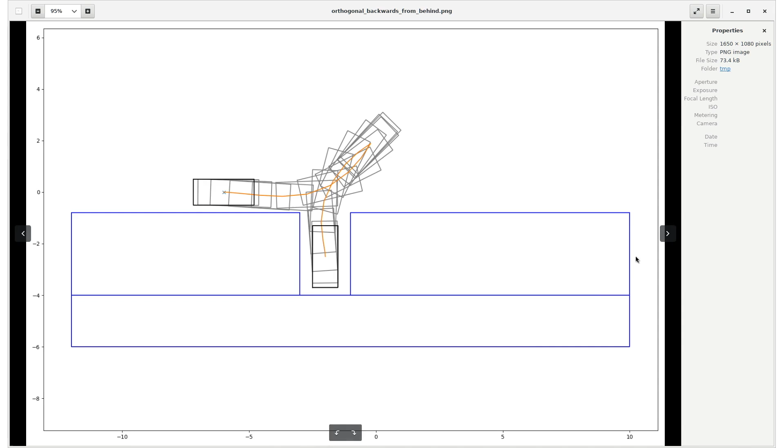All right, with this installed, we can now go and look at the figures, which the test procedure has placed in the temp directory. We can do it like so. All right, and now here we can see that for a variety of different maneuvers, the parking planner has successfully planned trajectories that drive from the starting position to the final position.

This concludes our lecture on both the practical and the theoretical part of what Embotech contributes to Autoware. I have shown you how to use the parking planner in isolation, and in the near future we plan on actually also integrating it with the rest of the simulation framework in Autoware.